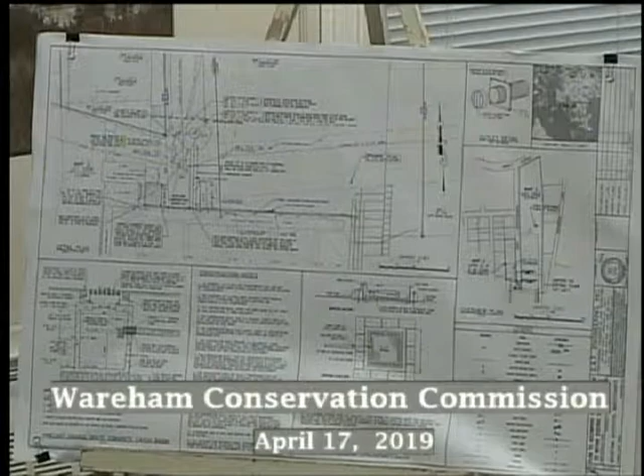Thank you, Mr. Rogers. We'll get to the project. The project site is at 0 Independence Point, or down at the end of Independence Way in Onset. The project involves stormwater structure repairs and the replacement of an underground fuel valve box. This is in the buffer zone to a coastal bank and also within a coastal flood zone. The project proposes to abandon an existing drainage outfall pipe and replace it with a new one that would outfall through the existing bulkhead, but in a new location from where the current one exists. Also, an existing catch basin would be removed and replaced with a new deep sump catch basin, approximately 40 feet from the existing bulkhead.

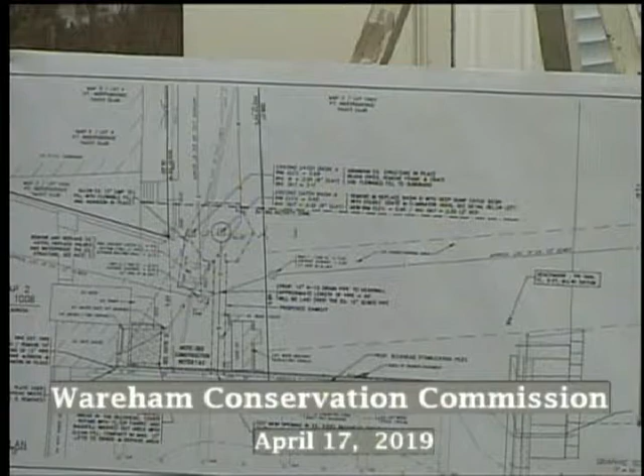So in terms of improvement of stormwater quality, that's really the only adjustment that's been made. In my opinion, I think there should be some other options explored to improve the water quality from this stormwater system. Beyond that, I did have a question about dewatering for the project, if that's going to be necessary, and if so, where the dewatering area would be identified.

We did discuss that a little bit previously, myself and Mr. Rogers. Also proposed as part of the project is to replace an underground fuel valve box, which connects the gas lines out onto the docks for the Point Independence Yacht Club. My only question there was whether or not the fire department's been involved with the review of this part of the project. We do have a DEP file number for this project, but I'd like to hear some discussion about the stormwater quality issues and what options could be available to improve that.

Thank you. Bob? Yes, Madam Chair. So everything that Dave said, I would agree with.

In terms of the dewatering, if you look on the overview plan, in the middle of the right-hand side, as Dave had requested, we had a meeting before we submitted this filing, so we located the dewatering up in the lawn area, just above where the fuel storage tanks and the end of the paved parking lot are. So we did do that.

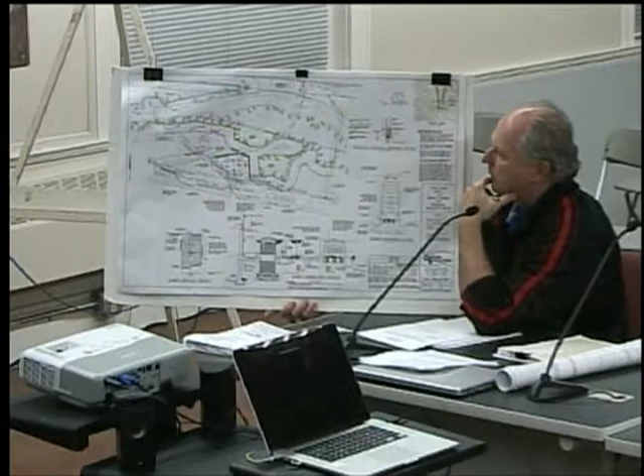This lot is about 3 acres, and we have a bordering vegetated wetland that cuts through the middle of the site. It appears to have probably been a former cranberry bog in portions. There's a stream channel that runs through there, an intermittent stream. To the back of the site, we have the railroad tracks.

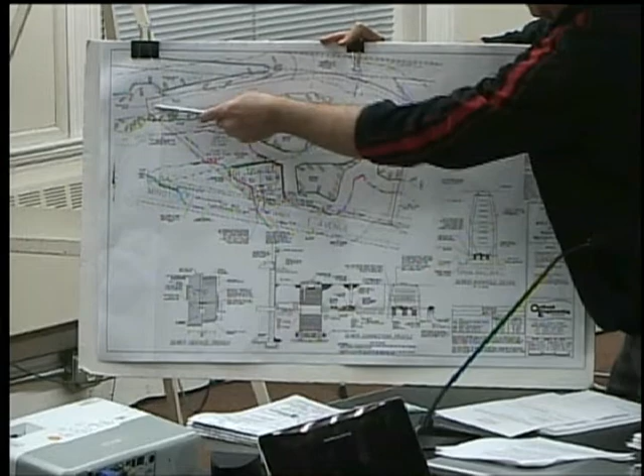For the Cape Cod Rail Trail. There's also a former pathway through this portion of the site that forms a ridge. And the Agawam River is actually probably another 50 feet or so off the page.

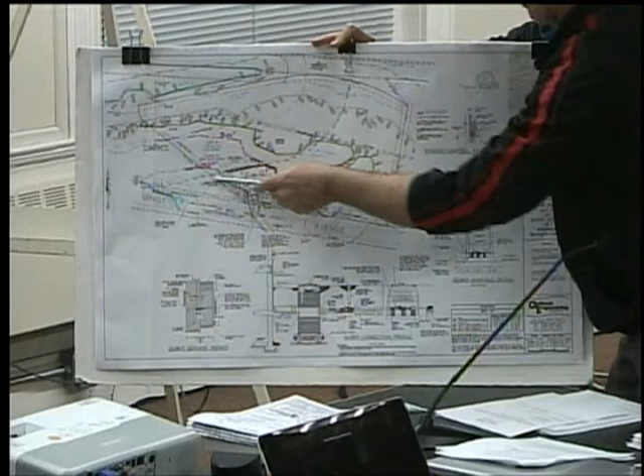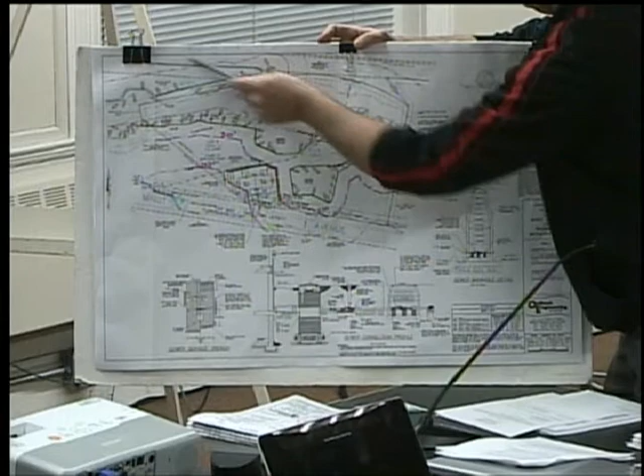So the riverfront area forms a 200-foot swath right through here. That's actually due to an inlet. There's a culvert underneath the railroad tracks, so this inlet would periodically be inundated. But the main riverbank is, again, off the page here.

So we have that 200-foot riverfront area, the bordering vegetated wetland, and then also the area subject to coastal storm flowage, which basically the entire lot is below that elevation. Minot Ave itself is at an elevation of about 11.5 to 12 feet in front of the lot. The flood elevation is 14, so the road is about 2.5 feet below that.

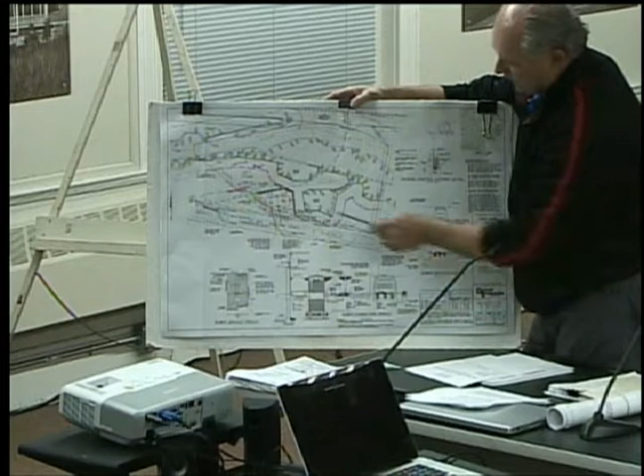So once we put in these setbacks to the wetlands and try to keep the work outside of the riverfront area, we're left with this area of the lot where we're able to place the structure. David asked how much fill is going to be required—it's on the order of about 1,200 cubic yards. We are installing a retaining wall on these two sides to keep the work completely out of the riverfront area and out of the 30-foot buffer zone.

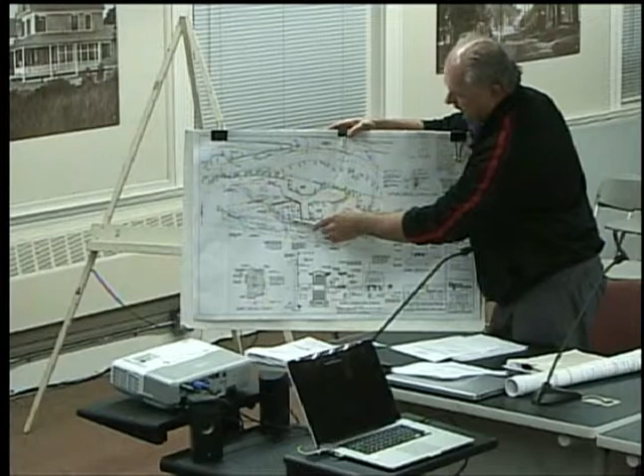So the only resource area we're doing any work in is within the flood zone. The amount of fill required is to elevate the structure above that base flood elevation of 14 feet. We're proposing the finished floor at elevation 16 to provide some freeboard, with the surrounding adjacent grade at 15. Then the driveways would just be sloped down to the existing roadway.

So we think we've minimized the amount of work on the lot to try to preserve as much of the wooded area as possible. Again, it's about a 3-acre lot. Can I ask why you couldn't just do 2 or 3 feet of fill instead of 6 feet to get the thing level with the road and leave it at that? So the issue with that becomes the flood insurance.

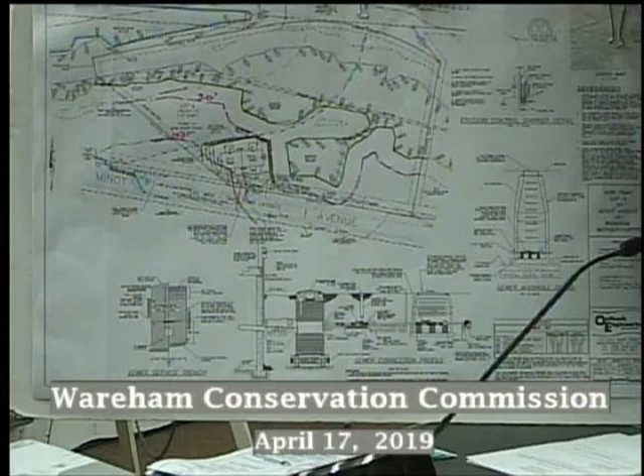Yeah, but that's not our concern though—that's not a conservation matter. We're just looking at the resource area and the amount of fill being placed. Whether there's flood insurance or not isn't relevant to this board. Okay. We are trying to minimize the amount of fill by putting in the retaining wall.

It's not even a ConCom issue, but I'm not sure if that eliminates the issue or not. That's something that would have to be looked into, but either way, in my view, it's a lot of fill for that area when you're talking about changing the grade by 5 to 6 feet.

You're going to have this island sticking out of the ground with a 6-foot wall that somebody could take a dive off of if they're not careful. Well, there would be fencing around the perimeter of that. But it would also drain the driveway into the street.

So that driveway would start at the street and go up how many feet to get to the house? 2 to 3 feet. It's a relatively gentle slope, not significant at all.

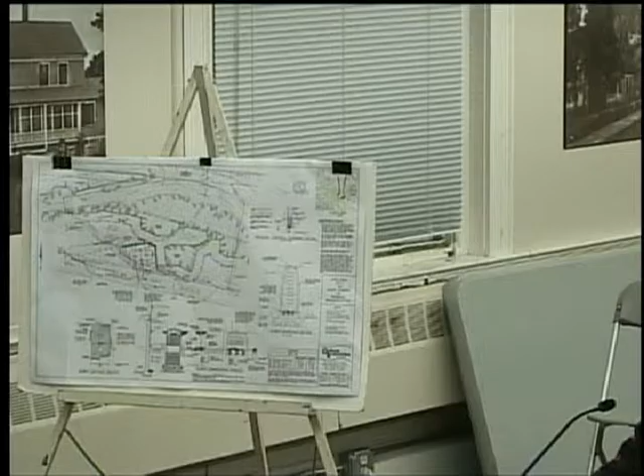Would that be easier with one driveway going in as opposed to two? Having those infiltration basins for two driveways as opposed to one? Are the two driveways what you really need or want? Well, we need to provide suitable parking for the duplexes.

I actually had an alternative layout that I thought of presenting tonight - this is where we'd provide a garage at the unit. There'd be no significant change to the layout itself, but we would provide a garage on the interior of the 2 units and then a driveway, so we might be able to reduce some of the impervious area with that. We could also consider doing roof drains if that's another concern of the commission - the amount of runoff from the homes and the driveway.

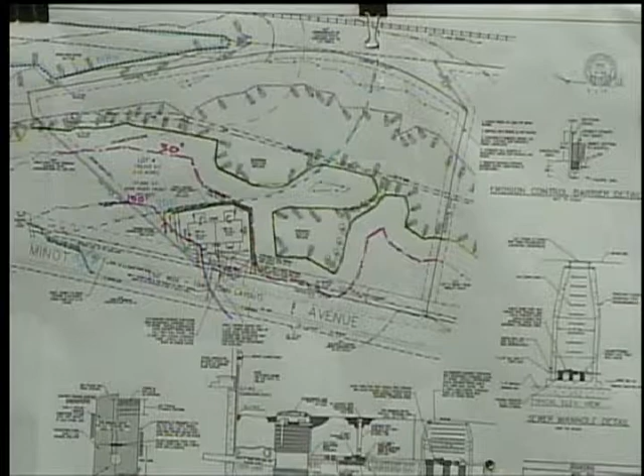So this was the third lot in the sequence, and the other 2 were actually simpler. I wish we had started from the other end - we're dealing with the most difficult lot right now. I had seen this one and I'm saying it's a shoehorn. That's the only thing you could have done, it would have been better if it was a single unit, because this is a tight fit.

Any questions? I don't know, I have runoff issues. Me too, with height, and I realize that the fill is just the least costly way to do it, but why not change the foundation?

From our point of view, changing the foundation is a fix to the runoff. Reducing the slope would let you leave the driveway at road height instead of pitching the driveway up - you would then park and walk up a couple of stairs instead. That would reduce the amount of fill needed to raise the house, but it would increase the amount of stairs to get into the house.

So if we were to ask you to reduce the pitch of the driveway, which means you would have to add steps to get into the house if you don't reduce the amount of fill - did I get that right? Am I right on that? Well, you'd have to reduce the fill basically to get the driveway grade flat, or flatter. Which probably changes the foundation design. Yes, it may or it may not - I can't speak to that, but it might.

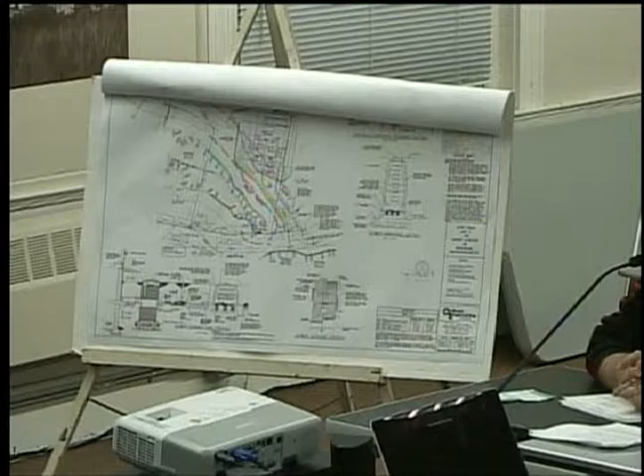So this is lot number 5 on Minot Ave. This again involves the construction of a duplex in the buffer zone to bordering vegetated wetland and within a coastal flood zone. For this one, it's a 40 by 64-foot duplex building, with each unit having its own 14 by 24-foot garage, and this would be approximately 72 feet from the edge of the wetland, and also within coastal flood zone AE elevation 14.

The limit of work for the duplex project is 30 feet from the edge of the wetland at its nearest point. Hay bales again and silt fence would be installed along the limit of work line for erosion control, serviced by sewer and water. The proposed driveways are to be paved, and I had an issue with having the driveways pitch away from the wetland so as not to direct runoff towards it.

We do have a DEP file number for this project, so I would recommend the issuance of the order of conditions with the standard conditions and the added condition that no work, including cutting of vegetation, be allowed beyond the limit of work line, as a continuing condition, and that the driveways be pitched away from the wetland so they don't direct water towards it, or that they be a pervious material if that option isn't suitable, given the elevation of these driveways.

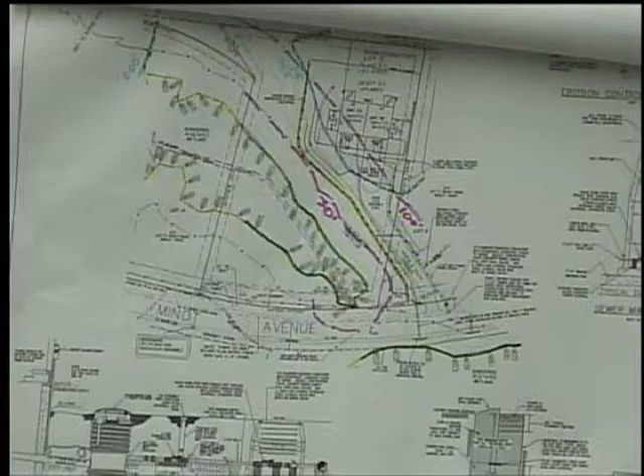Okay, thank you. So again, Jim Pavlik, and this is the adjacent lot to the other one we were looking at, and as I promised, it's much simpler.

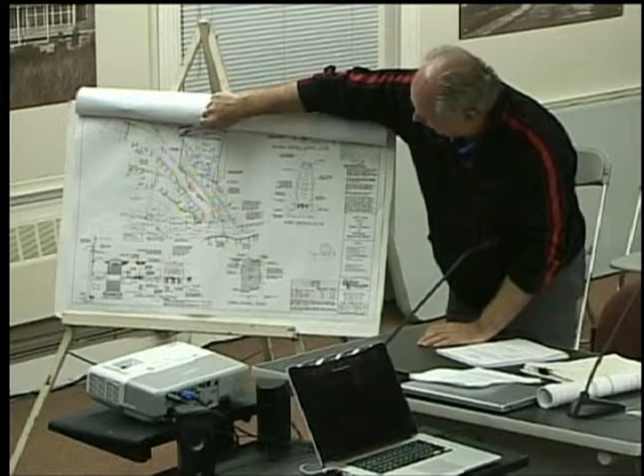So here, the extent of the 200-foot riverfront area comes up to here, which is on the adjacent lot. So the Agawam River is over 300 feet from the proposed duplex area. We do have this wetland here, a 30-foot no-touch zone, and this is the extent of the base flood elevation of 14 feet. So this area is below 14, and this portion of the site is above 14.

So that's why we're locating the structure in that location, outside of the flood zone. We're really just cutting in a driveway across the adjacent lot with utilities, and this is a common driveway for the two units. There's no retaining walls necessary here. So again, work is outside the 30-foot buffer zone, and the structure itself is completely outside the flood zone.

Questions on the board? I think we have the same problem again with the elevation of the driveway as it exits the garage to go down to Minot Avenue. We have the same problem again. Right, so...

Hearing Dave's suggestion, we could pitch the driveway so it's sloped away from the wetland. That would prevent any runoff from it. Does that put it sloping toward lot 6? Yes. Does that create an issue on lot 6? No, we haven't seen that. It's very sandy soils here, so we're not going to have a runoff issue.

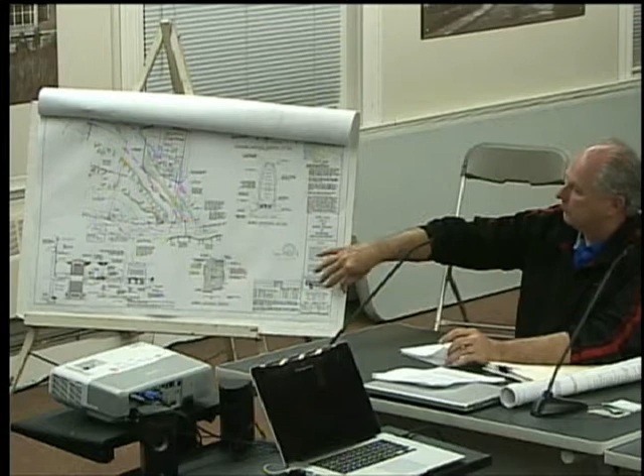Notice of public hearing pursuant to the provisions of the Massachusetts Wetland Protection Act, General Laws Chapter 131, Section 40, and the Wareham Wetland Protective Bylaw, Division 6. A public hearing will be held in room 320, Wareham Multi-Service Center, 48 Marion Road, Wareham, Mass., on Wednesday, April 17, 2019, at 7:15 p.m., on the notice of intent for the town of Wareham.

I've got the wrong one. Yeah, we'll just put little dots there, and we'll try it again. Let's see. You have one for lot 6?

Yes, I do. Okay, again, it was Rocky Road Realty Trust, care of... I'm sorry, just a point of clarification - it should be Lot 11, Rocky Road Realty Trust is the actual full name? Yes. As opposed to lot 6? No, he's saying in terms of the name of the entity. Oh, that's okay, scrivener's error.

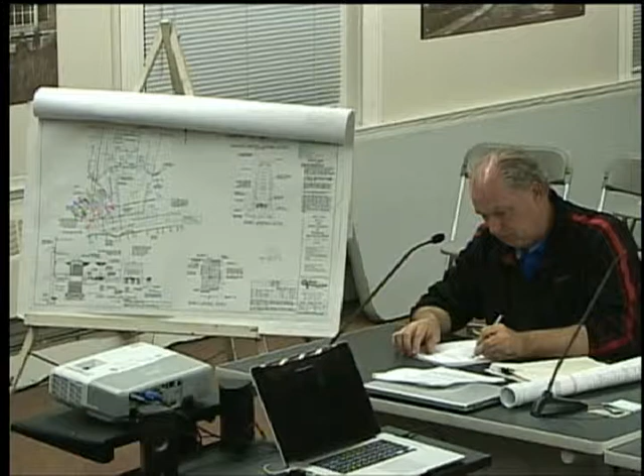Go ahead - I just, if you're showing the order, that should be the full name, Lot 11, Rocky Road Realty Trust. Sure. Lot 11, Rocky Road Realty Trust, care of Outback Engineering, Inc., 165 East Grove Street, Middleborough, Massachusetts, 02346, to construct a duplex located on Assessor's Map 43, lots 1072, 1074, and 1070C, Lot 6, Minot Ave, Wareham, Mass.

Thank you. Mr. Bichette will read to the project.

Got a little one coming, trade me.

Okay, so this is the next lot adjacent to the one we just reviewed, lot number 6. This project involves construction of a duplex which is partially within a coastal flood zone. It's a 40 by 80 foot duplex building, with each unit having a 24 by 24 foot garage. It's partially within coastal flood zone AE elevation 14. The duplex and garages are outside the buffer zone to the wetland.

The duplex would be serviced by town sewer and water. The proposed driveways are to be paved, so I'd have a similar recommendation on pitching the driveways so they don't drain towards the wetlands. We did get a DEP file number for this project, so I'd recommend issuance of the order with the standard conditions plus the added conditions relative to the driveway. In this particular site there's no work in the buffer zone as far as the dwelling, and you have the other driveway and dwelling between this one and the wetlands, so I don't think you need any conditions about limits of work.

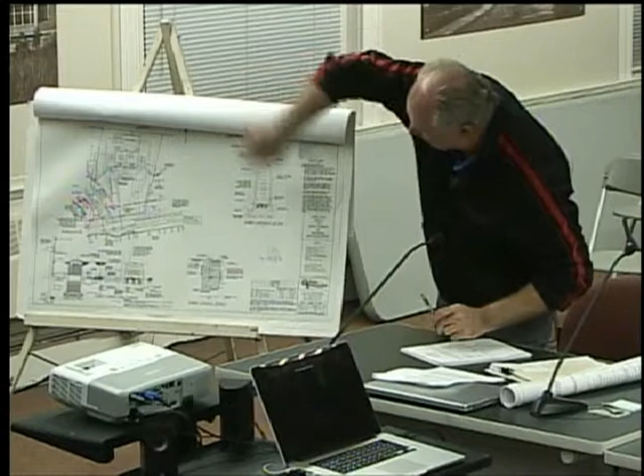Thanks, Dave. So this is the simplest lot. Here we're now furthest away from the Agawam River, closer towards the fire department and Depot Street. This is the 14-foot base flood elevation, which encompasses the entire front portion of the lot, whereas the back portion of the lot, closest to the railroad tracks, is above that 100-year flood elevation of 14 feet. So that's where we're locating the structure, and we just need to cut across the flood zone area with a driveway and the utilities.

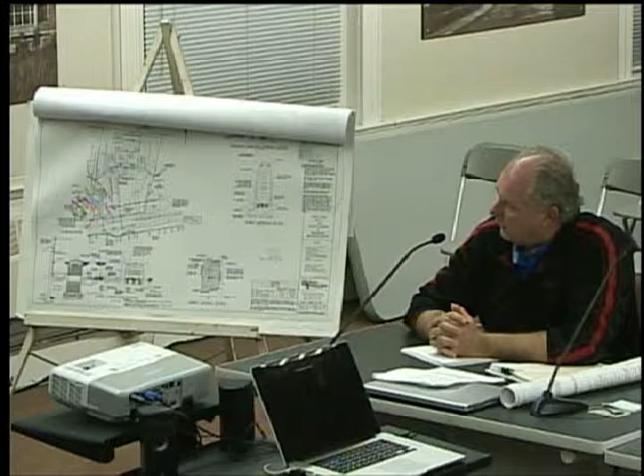Much simpler. Now this is next to an existing dwelling on the next lot. Is this the area where they've been storing all their vehicles, that floods quite frequently and becomes very muddy, if I'm looking at this location?

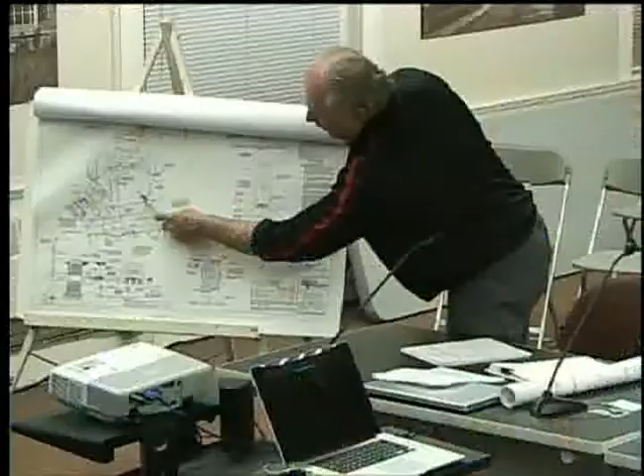Partially. There's trucks there, it's like a gravelly gray area now, part of the lot. People are putting their trucks on it and stuff like that. That's actually on this lot, and the dwelling you're talking about is right here. So they have a parking area here — the old TV shop, I believe they've been using, or someone has been using that front portion. It's wet there, but that's just a puddle because it doesn't drain well since they put gravel there. So that's something the owner of our lot has been talking to the people about, requesting them not to use this lot for storage purposes.

Is it something where both driveways could be slanted slightly to the middle, to give us a rain garden or something in the middle? Sure, absolutely, because that does accumulate water in that lower area. Just something to think about.

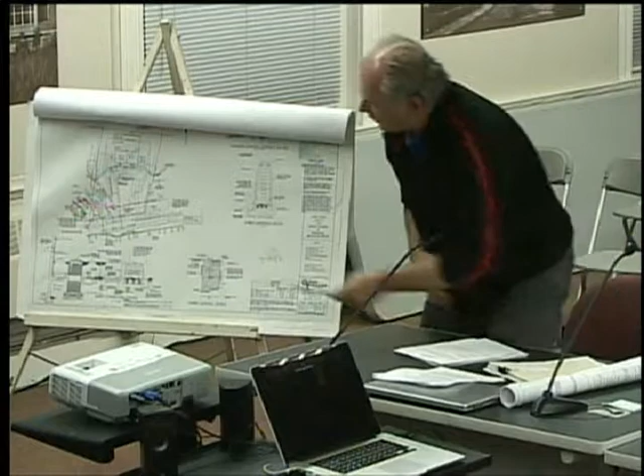We're going to be looking to actually remove that gravelled area, reloam and seed it, and put in a better type of material. We're also going to be putting in a row of shrubbery along the edge of the lot line. So we're looking to restore that area and not keep it as a gravel area.

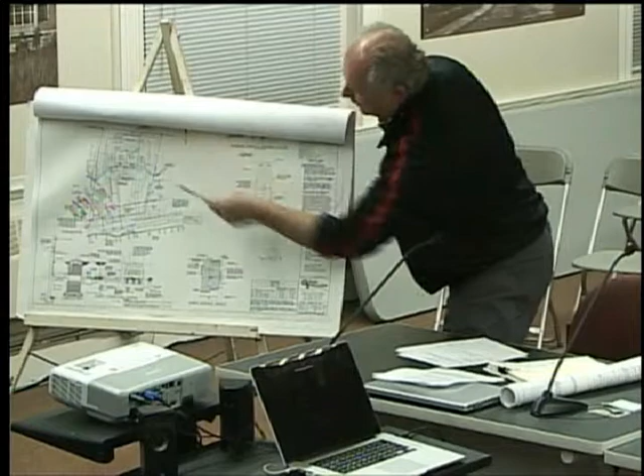Just a question — how far is the back of this house from the railroad tracks? Not far — the back lot line is about 70 feet from the dwelling, and that lot line is the area of land owned by the railroad. So the track itself is actually probably 100 feet or more.

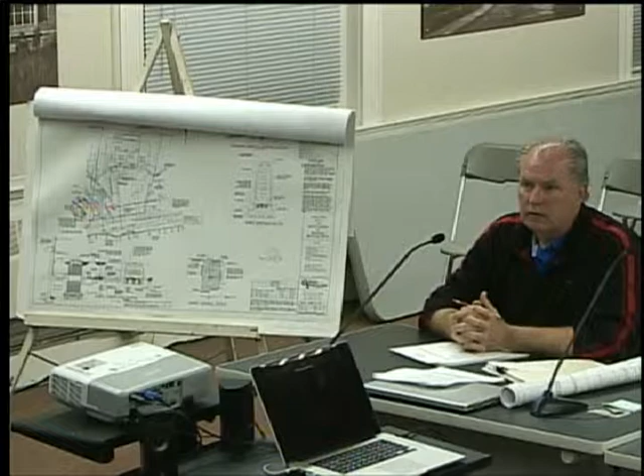Okay, any other questions on the board? I'd make the recommendation that we slope both driveways toward the center, into a sort of water retention area. That will probably pick up some of the water that comes off of Lot 5. Because you're going to be putting water from Lot 5 onto Lot 6, correct? A little bit.

By doing that, you can reduce the amount of water that goes onto Minot Ave, because right now that stormwater drain on Minot Ave really struggles — it's literally one of the worst holes there, pothole after pothole. Any other questions on the board?

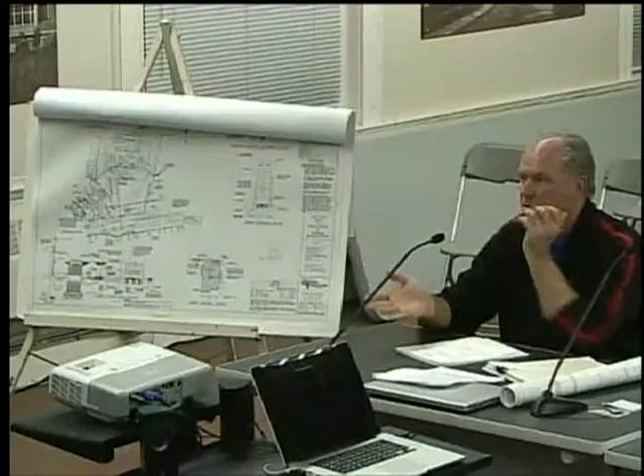Question for you — this water retention pool, if you will, a water retention feature or something? I'm not quite understanding what that's going to look like. A slight depression in it to keep the water — it becomes full of rocks and stuff like that, with some plantings in it to help keep the water from flowing off and let it seep back into the ground. We could make a shallow landscaped feature, a mulched rain garden type of feature.

And normally some type of grasses or something to say, I'm going to absorb the water as opposed to putting it on the street. Oh, I understand the purpose of it. I was curious as to what- I would like to see it on the plan. So if we can continue.

Anybody in the audience for this? Could we make it a condition, or would you prefer to see a plan? You could make it a condition, because really the only issue is the flood zone, not the buffer zone to wetlands, with what they're doing, so I would be okay with a condition on this particular one, but it's up to the board. If you'd prefer to see it on the plan first, that's the board's option.

I think a condition would work and it would get them off the docket. Do you want to call it a water retention area, a rain garden? I don't want to call it a formal rain garden, but a water retention area? I don't think you can do Stormwater just like that - that's sort of ambiguous. What would you like to call it, a name? Sandy's garden? No, I don't think so. I might suggest a rain garden or infiltration swale-like feature.

I like infiltration swale. It doesn't need to be large, I don't want it a formal monstrous thing, a formal garden. So we'll call it an infiltration swale feature to collect the water runoff from the two sloping driveways.